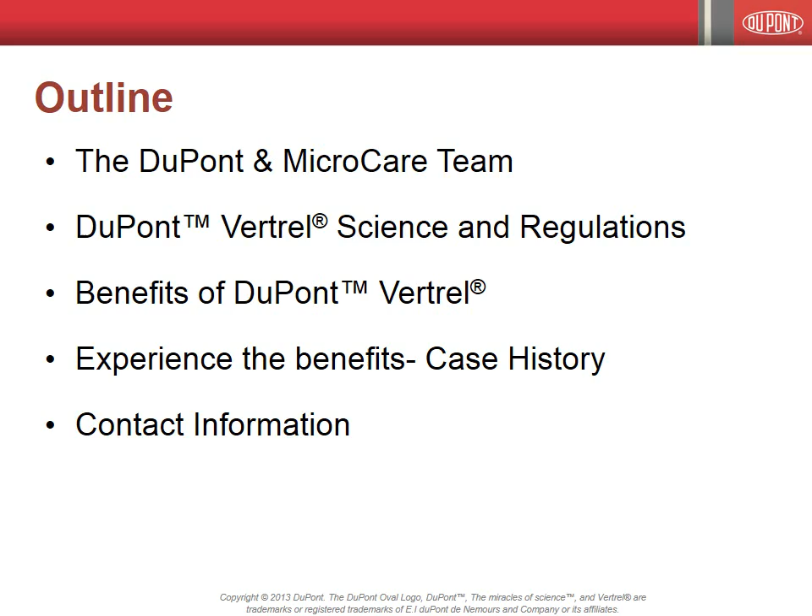Hello, I'm Tom Tattersall, Executive Vice President of the Microcare Corporation. Microcare is a leading supplier of cleaning and coating fluids to the marketplace. We are DuPont's Vertrel Cleaning Fluids premier partner for this product line.

When I am asked to describe my business at Microcare, I simply put it, I am in the business of providing clean parts for my customers. Because at the end of the day, we are judged by how the process we helped install cleans their parts. Yes, Microcare gets its revenue by selling precision cleaning fluids like DuPont Vertrel, but to meet our customers' cleaning challenges, we must view this operation as a process: equipment, labor, chemistry, operating cost, maintenance, etc. All aspects must be evaluated in order for us to provide clean parts.

In viewing a cleaning operation as a total process, we work hard to assist customers from making common mistakes. Believe it or not, people often want to piecemeal their cleaning process. In other words, force-fit pieces to make their process work, versus stepping back and viewing it as an opportunity to improve their operations. They demand to use equipment that already exists or they already own for their cleaning process without ever thinking of ramifications. Many never want any outside consulting help or assistance. And of course, we are all faced with the inertia of continuing to do what we always have done.

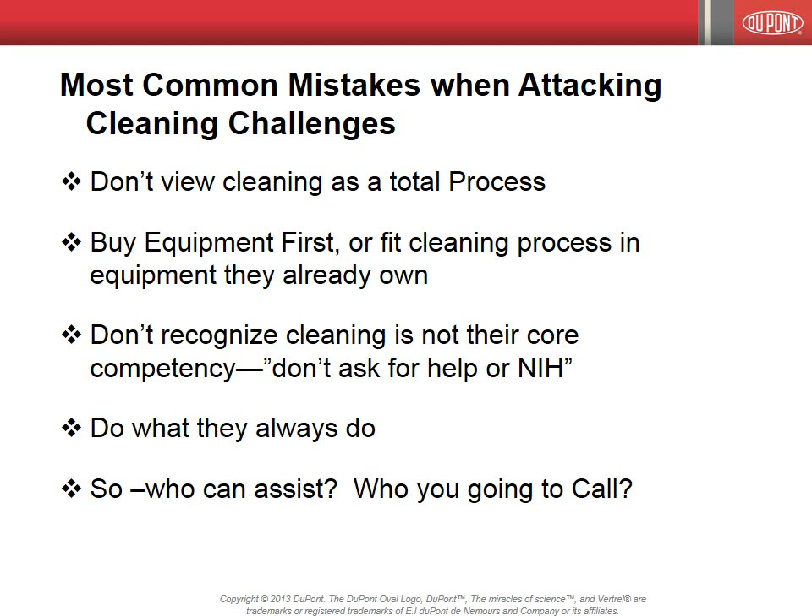Understanding that cleaning may not be your core skill, who can assist? Who are you going to call? I am here today to remind you to call us, the DuPont and Microcare team of cleaning experts. Let me share with you a few characteristics of our team, which may be new to many of you.

Part of any cleaning operation is the precision cleaning fluid, its chemistry. DuPont is synonymous with chemistry. Many different grades of cleaners have been tested and developed by DuPont to meet your cleaning challenges. At Microcare, we have nearly a dozen regional managers, all technically trained in engineering or chemistry, supporting the global regions. Both DuPont and Microcare have applications labs and high-end analytical equipment to support customers and cleaning process development.

We work hard to understand the current regulations to build you a sustainable process. All of our efforts are to design and assist you in developing a cleaning process where we strive to give you the lowest cost to operate and clean your parts. In other words, we are confident that by working with us, your cleaning costs will be the lowest dollar per part clean you could have.

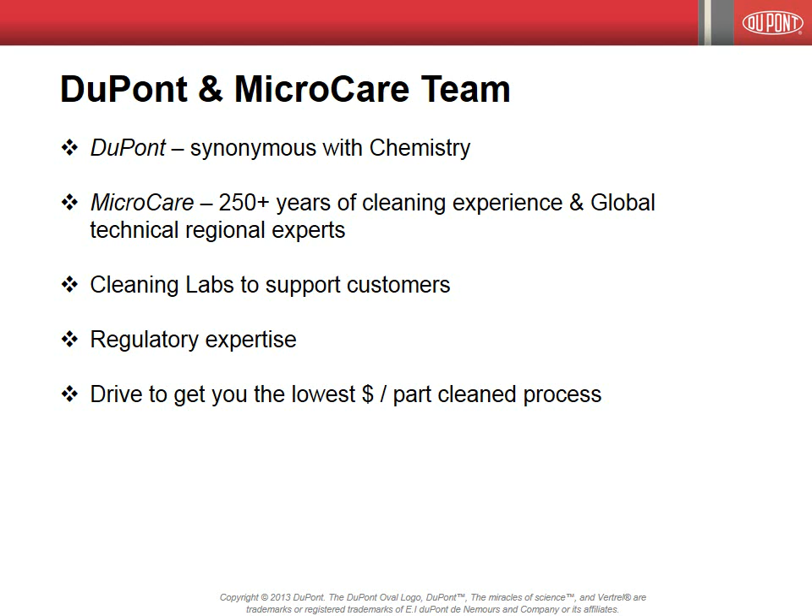It is safe to say we want to be part of your engineering team, there to assist you to meet your own unique requirements. Now, we understand some challenges are easier than others. So, what type of applications do DuPont and Microcare excel at?

I think you can look at our areas of expertise or our focus through the following outline. We work to provide clean parts where it is difficult to achieve consistent cleanliness of your parts. Examples would be parts that require the highest level of cleanliness, parts with complex geometries. They may be built with sensitive materials of construction. They may be designed with small spaces or blind holes, or nothing else seems to work. If any one of these challenges exist, we will be a big help to you.

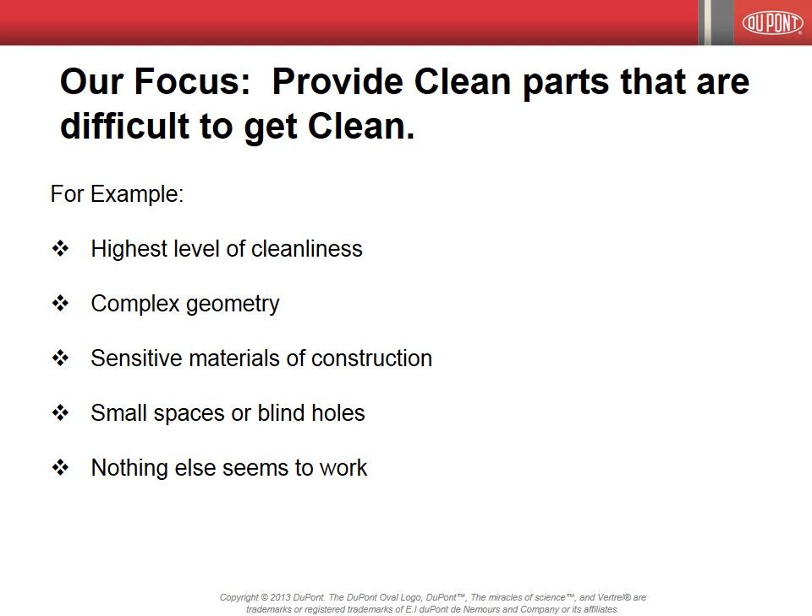We can solve the less complicated with the same thorough analysis, but the real difficult cleaning challenges are where we excel. I remain confident, as this is what we have unmatched experience with, our favorite cleaning process: modern-day vapor degreasing. Although the theory is the same from years ago, the modern-day vapor degreasing process and operation is a bit more sophisticated than before.

Many new and younger engineers are not familiar with the vapor degreasing process. The vapor degreasing process has been around at least 60 years, as it was developed to clean high-volume applications such as automobile manufacturing, appliances, airplanes, which were needed after World War II. The introduction of the circuit board introduced new cleaning requirements and high-volume requirements where vapor degreasing gained widespread acceptance as the preferred method of cleaning.

Halogenated solvents based on chlorine, bromine, and fluorine dominated the cleaning fluids of choice. In fact, all are used today. As the ozone issue of the 1990s took place, many manufacturers had little choice but to design aqueous cleaning systems for their cleaning needs. Now that many of those systems approach the end of their usable life, vapor degreasing is a worthwhile cleaning process to evaluate and choose, especially where critical parts or critical cleaning needs are in play.

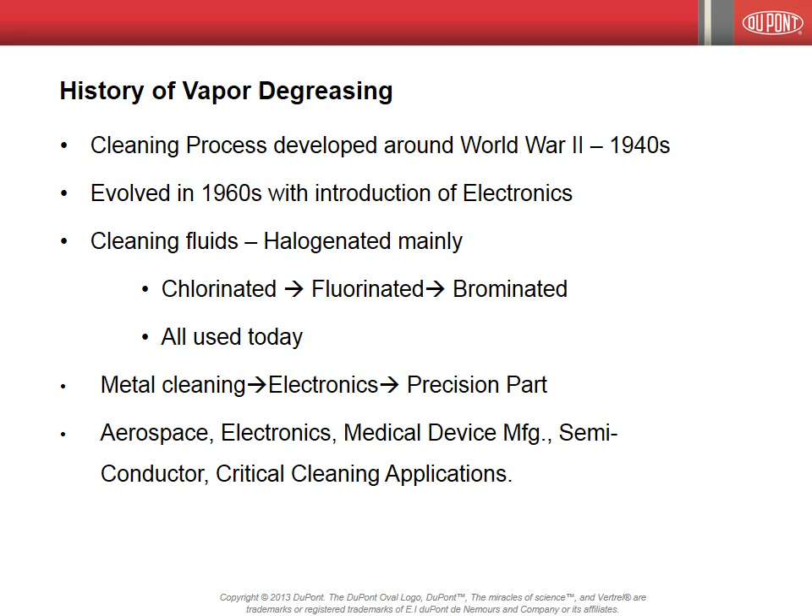There are many advantages for the customer with this process method. Why use the vapor degreasing process? Here I have listed a few of the more significant advantages.

Once the cleaning process is validated, very little monitoring is necessary to produce clean parts day after day. The manufacturing engineer and lab do not have to take daily samples to ensure the chemistry or water effluent meets their requirements. Sensitive parts and materials will not flash rust with this method. The process does not require an additional drying step.

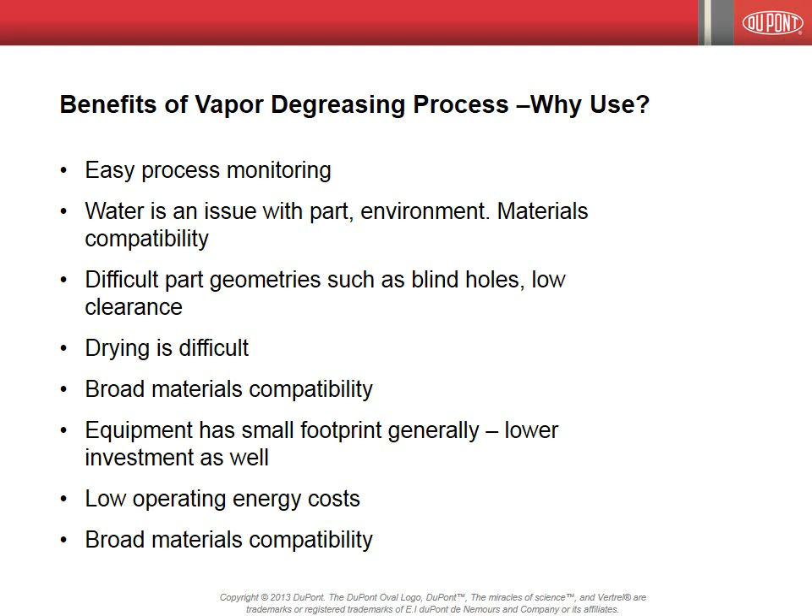Parts with extremely small openings or blind spots can be cleaned effectively, consistently. The process is highly energy efficient, leading to lower operating costs. And finally, the footprint of the vapor degreasing machine is significantly smaller than aqueous systems, and in general, less capital is required to install.

Vapor degreasers offer a very flexible process and are available in multiple sizes to handle practically anyone's cleaning and volume requirements. Here are a few design parameters which are questioned and discussed in any project. The answers help determine the size of the vapor degreaser to specify.

A key point to remember is that a solid equipment design up front assists in minimizing solvent loss during operation. This leads to lower operating costs for a customer's cleaning process. Vapor degreaser manufacturers exist worldwide, each with their own design twists for you to evaluate.

I like to consider the vapor degreaser an elegantly engineered machine. It cleans, rinses, dries, and recycles, all in one unit. Regardless of which manufacturer we are working with, they all go through these 4 process steps.

Now, before I introduce Dr. Mark Robin of DuPont, who will lead a discussion on vapor degreaser precision cleaning fluids, I'd like to review a couple key points about regulations.

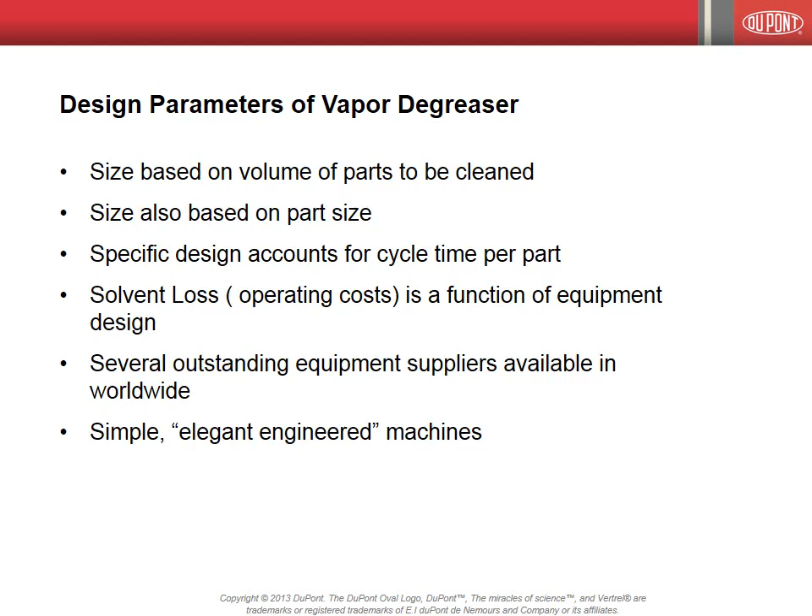The one item I want you to walk away with is that the DuPont and Microcare team can work with you to design a cleaning process that meets local, state, federal, and country-specific regulations. We understand these regulations and in turn work with our customers to meet them. The goal is a validated, sustainable cleaning process every time.

So we have chemistry and process designs that meet the following. We use USA EPA SNAP-approved chemistries. Our chemistries are REACH registered. We can meet F-gas standards. We can design a chlorine-free process as well as a VOC exempt process. Whatever your goals, we will work to meet and surpass them and provide you clean parts.

Don't believe the propaganda by other manufacturers who claim that their one solution fits all. It just isn't so. What you really need is expertise. Expertise we would like to provide as the DuPont Microcare cleaning team.

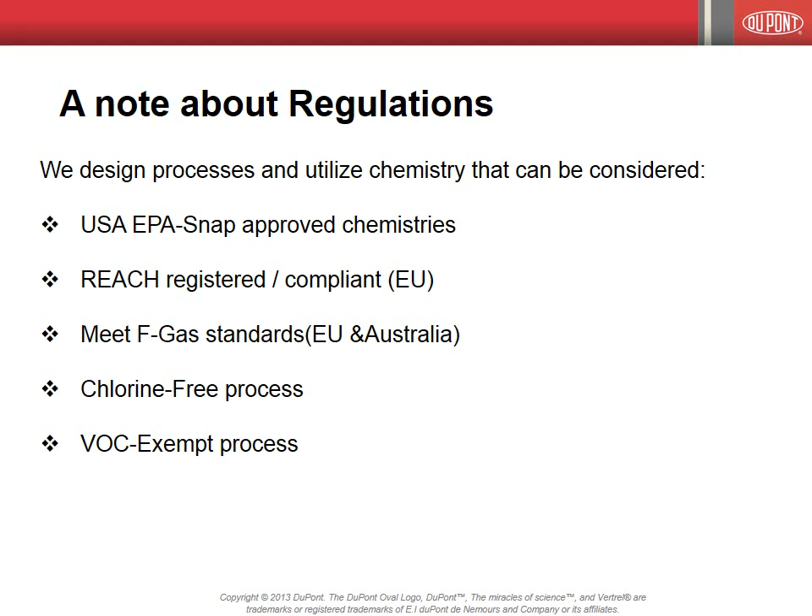Thanks, Tom. Good morning, good afternoon, or good evening, depending upon your location. I'm Mark Robin, Senior Technical Services Consultant for DuPont Chemicals and Fluoro Products. Thank you for joining our webinar, which we hope will provide you with an understanding of the unique properties of the DuPont Vertrel specialty solvents and their use as sustainable replacements for N-propyl bromide, trichloroethylene, and HCFC 225 in precision cleaning applications.

The Vertrel family of specialty fluids is based on Vertrel XF, the basic properties of which are shown here. The molecular structure of Vertrel XF imparts to it a unique combination of physical properties, which make it an ideal solvent either by itself or in combination with other solvents in a myriad of applications. Vertrel XF has a relatively low boiling point of 55 degrees C, is fast drying, non-flammable, and characterized by low toxicity.

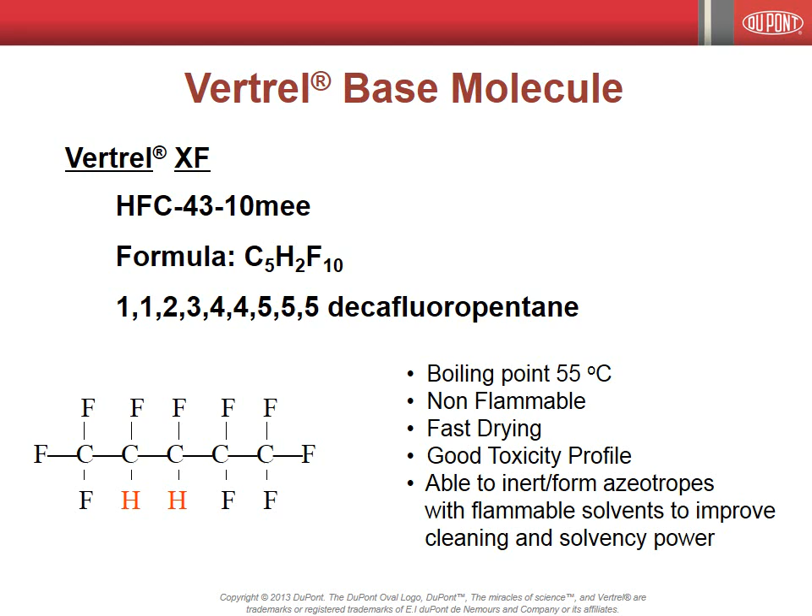The Vertrel product line is comprised of Vertrel XF used alone as a neat solvent and numerous blends of Vertrel XF with other solvents. Combining Vertrel XF with different co-solvents allows for the adjustment of the solvency power of the resulting multi-component solvent, allowing one to fit the solvency power to that required for a particular application. For example, the kb values of Vertrel products vary from 11 to over 100.

Vertrel XF can also be employed as an inerting agent, where it is mixed with a flammable solvent or solvents to provide a solvent of reduced or no flammability. The ability to mix Vertrel XF with other solvents can also be employed to improve the toxicity profile of other solvents.

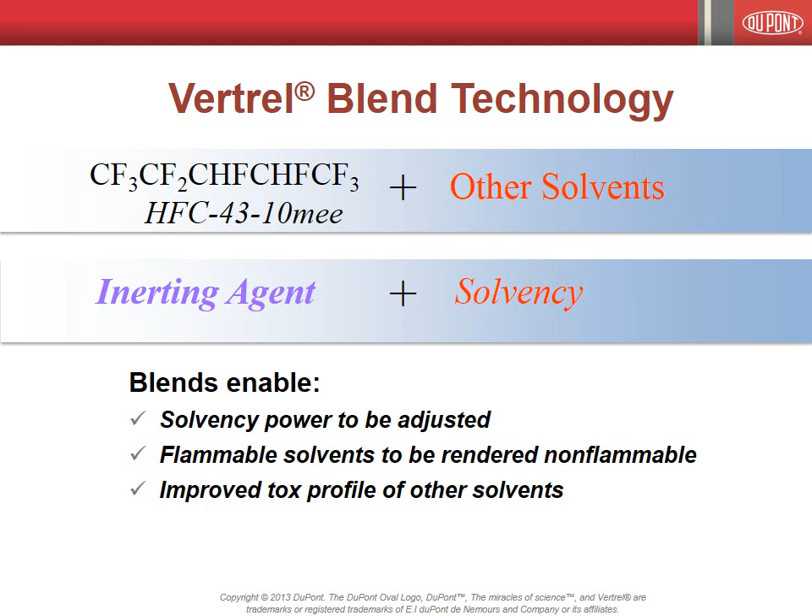This slide provides a summary of the Vertrel family of specialty fluids. As seen in the chart, Vertrel specialty fluids are suitable for a very wide variety of applications.

Vertrel XF itself finds application primarily as a carrier fluid and rinsing media, and is also suitable for some light soil cleaning and particulate removal. Vertrel XF is also suitable as an ingredient in aerosols and as a dielectric coolant.

The Vertrel XM, XE, XH, and XP products are suitable for light soil cleaning, particulate removal, and wipe cleaning. Medium and heavy soil cleaning, degreasing, defluxing, and silicone removal are readily accomplished with the Vertrel SDG, SFR, SMT, MCA, and MCA Plus Vertrel products.

Due to their high solvency power, low surface tension, and non-flammable properties, Vertrel SDG and Vertrel SFR in particular are excellent solvents for use in vapor degreasing applications.

For flux removal applications, Vertrel SFR is the solvent of choice for removal of high temperature fluxes used in lead-free and no-clean solders. For water displacement type drying applications, Vertrel XDA and XDF are suitable solvents. For absorption drying applications, in addition to silicone deposition and removal, Vertrel XP10 or XSI are suitable solvents.

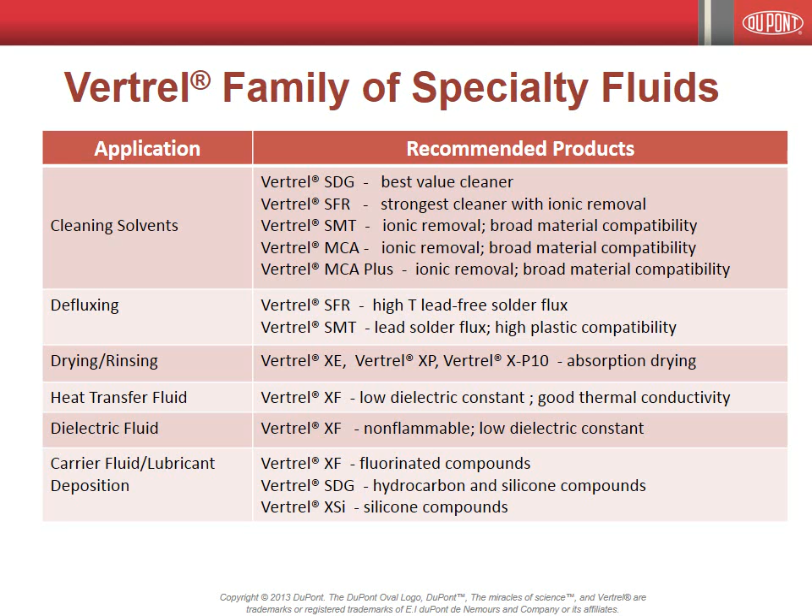High solvency power is a key criteria for solvent selection. As seen in this slide, Vertrel fluids offer a wide range of solvency powers, as measured by Kb values ranging from 11 to greater than 100.

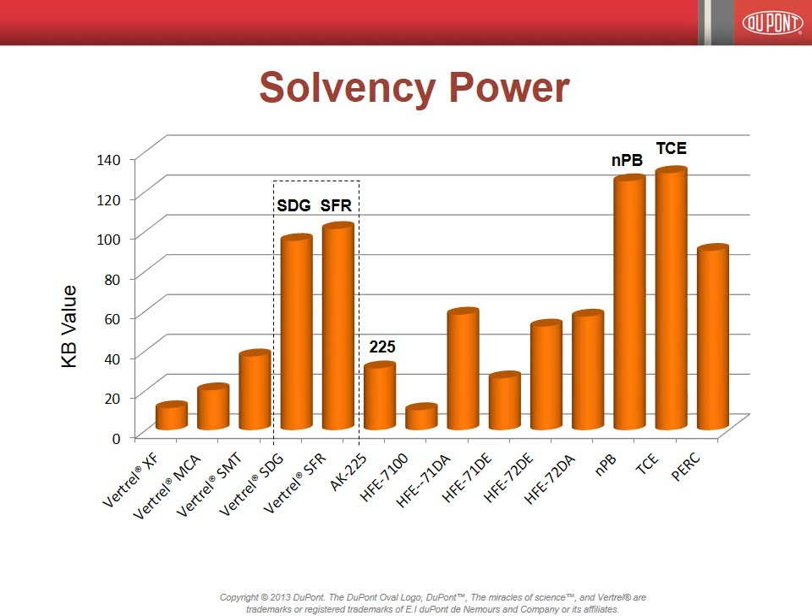For example, the solvency powers of Vertrel SFR and Vertrel SDG are close to those of NPB and TCE, and approximately 3 times that of HCFC 225, making these Vertrel solvents ideal replacements for NPB, TCE, and HCFC 225 in precision cleaning applications. Worker safety is another key consideration in solvent selection.

To ensure safety in use, the toxicity of a solvent should be as low as possible. Vertrel fluids are characterized by low inhalation toxicity and as a result pose little risk of adverse effects when airborne exposures are maintained below established limits.

As seen in the graph, Vertrel offers the lowest level of toxicity of the indicated solvents, especially in comparison to NPB and TCE. It can also be seen from the graph that the exposure limit for Vertrel is higher than that of rubbing alcohol. That is, Vertrel is less toxic than rubbing alcohol.

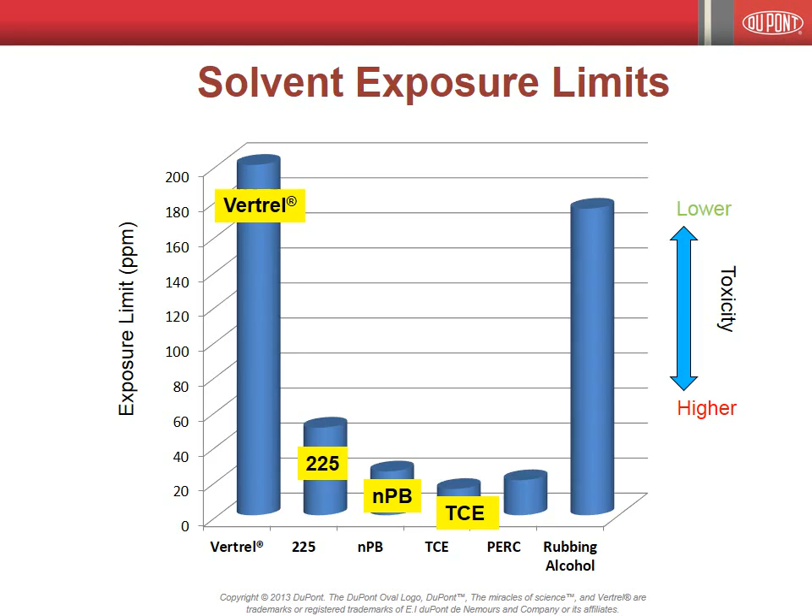In addition to their suitability in a wide range of cleaning applications, ranging from light soil removal to demanding oxygen service cleaning, the Vertrel specialty fluids, in particular Vertrel SDG and Vertrel SFR, are ideal replacements for current solvents such as NPB, HCFC 225, and TCE, all of which are faced with looming use regulations.

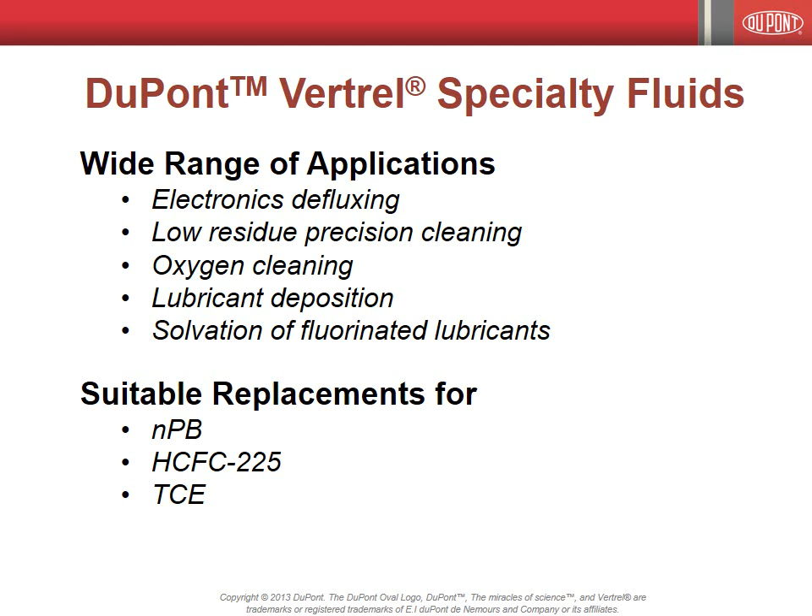Let's take a brief look now at regulatory issues related to HCFC 225, NPB, and TCE.

Due to their ozone-depleting properties, the US EPA has ruled that HCFC 225, as well as any remaining supplies of HCFC 141B, cannot be used in vapor degreasing applications after January 1, 2015. Users may continue to use solvent already in a vapor degreaser, but makeup solvent is considered a controlled substance. In addition, no stockpiling of HCFC 225 is allowed.

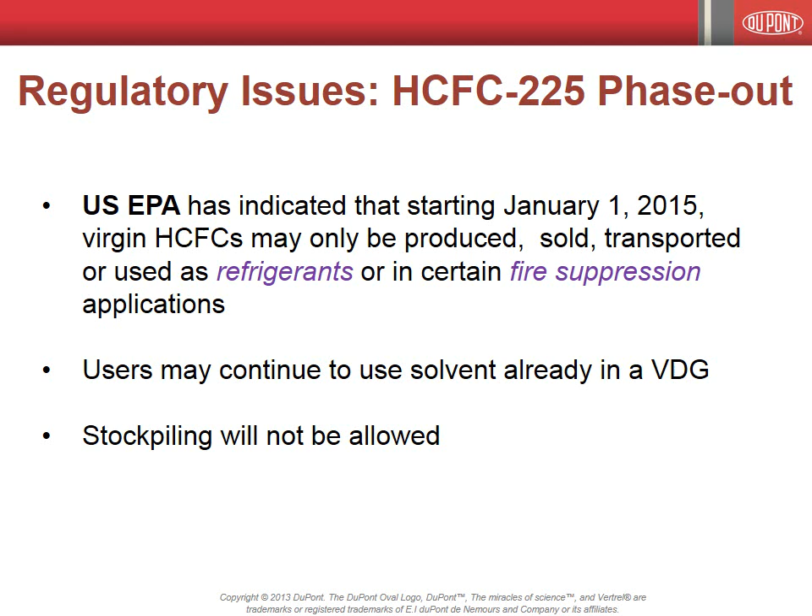NPB, or N-propyl bromide, is under scrutiny by several regulatory agencies. The US EPA is currently considering petitions to classify NPB as a hazardous air pollutant, an HAP. The National Toxicology Program of the US Department of Health and Human Services has reported that NPB is carcinogenic in rats and mice.

The American Conference of Governmental Industrial Hygienists is currently reviewing the threshold limit value, or TLV, of NPB. The US EPA recommends a value of 25 parts per million for the 8-hour weighted average TLV for NPB.

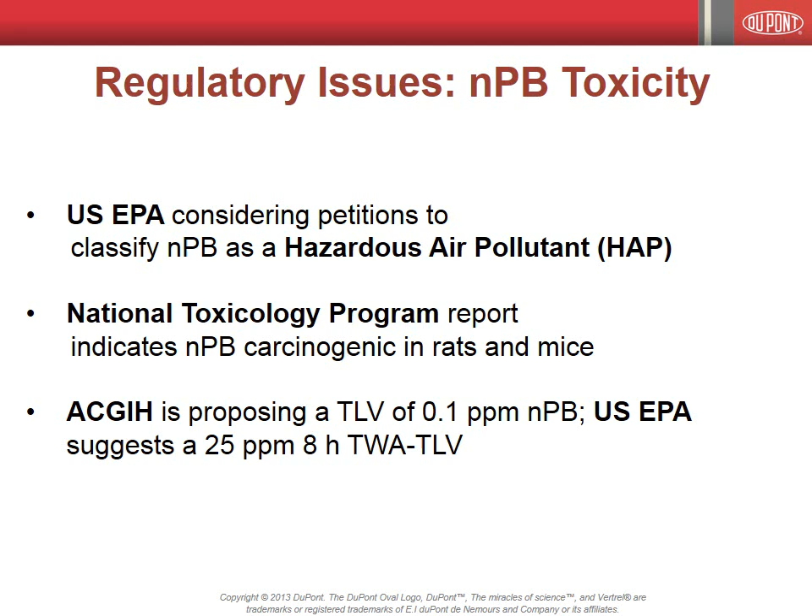In late July of this year, OSHA and NIOSH issued a hazard alert on NPB urging efforts to safeguard workers from exposure to NPB. The OSHA news release indicates that workers exposed to NPB can suffer serious health effects even long after the exposure has ended.

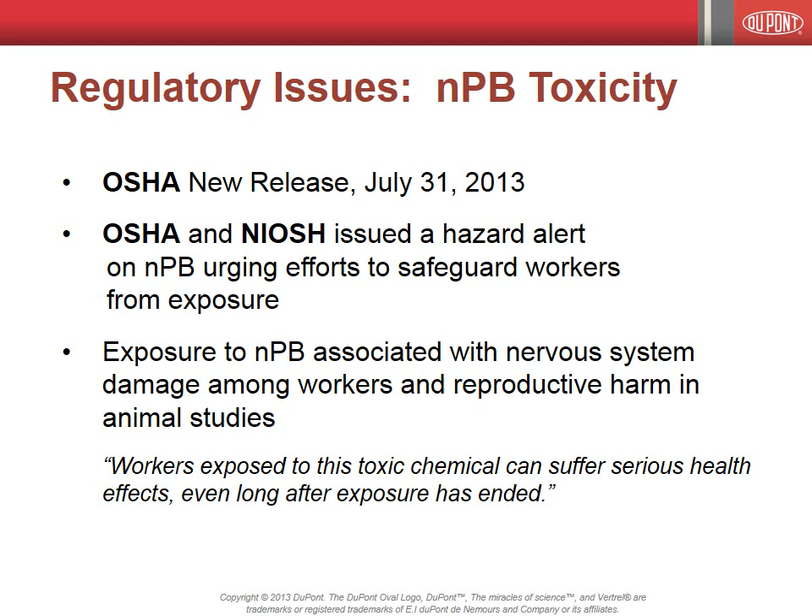TCE, or trichloroethylene, continues to face increasing regulations, both domestically and abroad, and is a potential carcinogen.

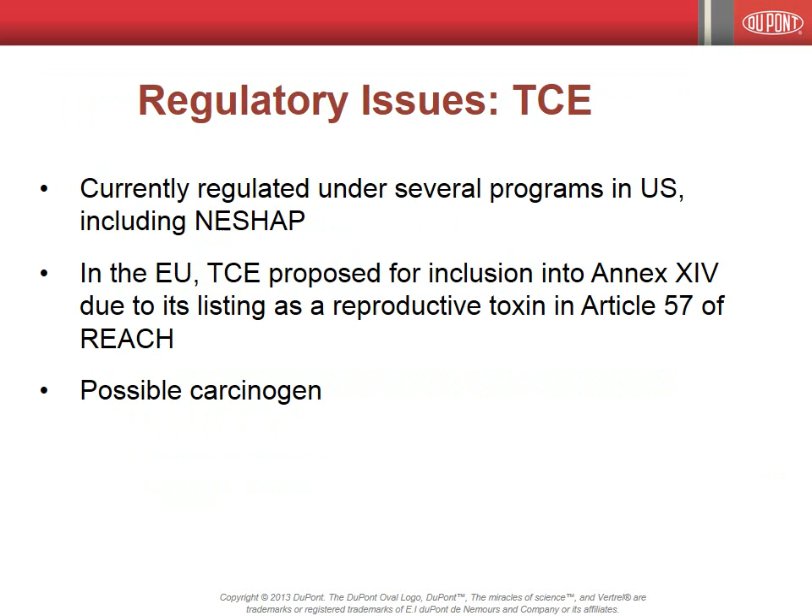Let's now take a look at 2 DuPont solvents suitable for the replacement of HCFC 225, NPB, or TCE. 2 of the most widely employed Vertrel solvents are Vertrel SDG and Vertrel SFR.

Vertrel SDG has excellent solvency power with a Kb value of 95, a low boiling point of 43 degrees C, is low in toxicity, and is non-flammable. These properties, along with its low surface tension, make Vertrel SDG an excellent ultrasonic vapor degreasing solvent.

Vertrel SDG is compatible with a wide range of metals, plastics, elastomers, and organics, and can be employed in vapor degreasing equipment with little or no changes to the equipment.

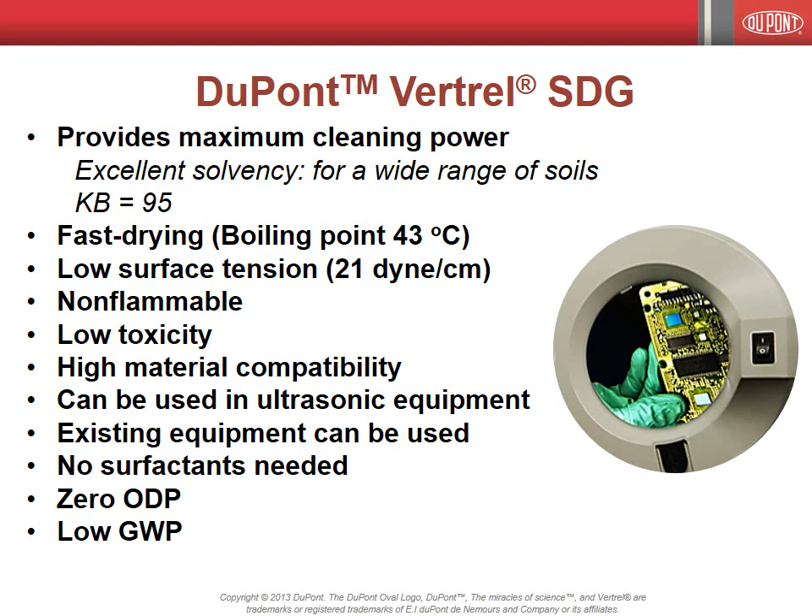Vertrel SDG is suitable for a wide variety of applications, including light, medium, and heavy soil removal, silicone deposition and tube swelling, silicone oil, grease, and wax removal, and carrier fluid applications.

Vertrel SDG is characterized by a 0 ozone depletion potential, low global warming potential, and low toxicity, rendering it an ideal replacement for environmentally unfriendly or toxic solvents such as HCFC 225, NPB, or TCE.

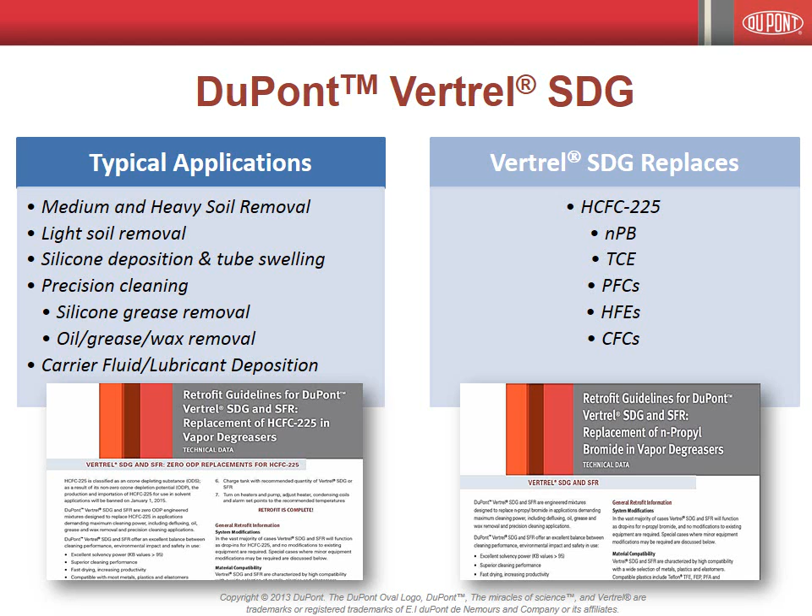Vertrel SDG was recently evaluated against other new solvents in precision cleaning applications by the U.S. Army and NASA as part of their efforts to replace N-propyl bromide, NPB. U.S. Army and NASA requirements for an NPB replacement include the following: the solvent must have a lower toxicity than NPB, and it must not be classified as a hazardous air pollutant, an HAP.

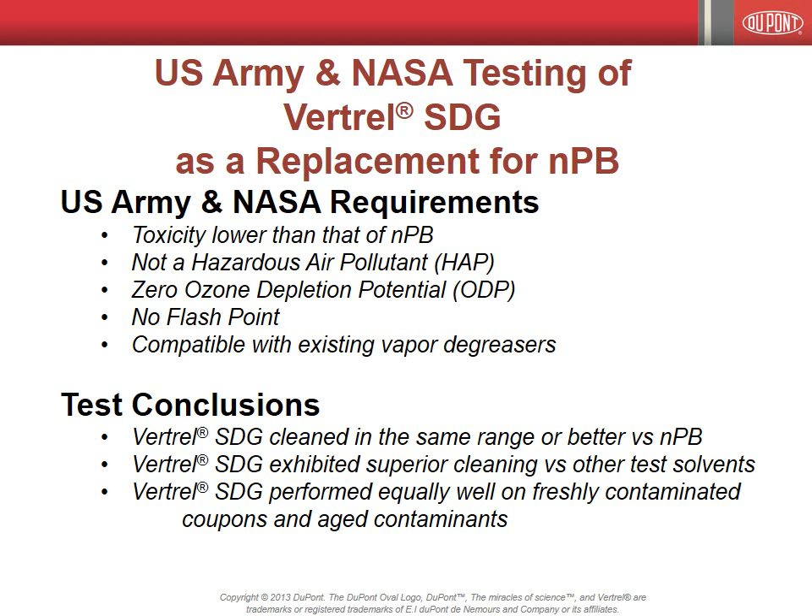The replacement solvent must have a 0 ozone depletion potential, exhibit no flash point, and must be compatible with existing vapor degreasing equipment. The U.S. Army and NASA testing found that Vertrel SDG cleaned in the same range or better than NPB, and that Vertrel SDG provided superior cleaning compared to all other test solvents. Vertrel SDG was also found to perform equally well on freshly contaminated coupons and aged contaminants. A copy of these reports can be made available upon request.

Vertrel SFR is characterized by very high solvency and is an excellent choice for ionics removal. It is compatible with a wide range of metals, plastics, elastomers, and organics, and can be employed in vapor degreasing equipment with little or no changes to the equipment. It is fast drying, has a low surface tension, and is non-flammable.

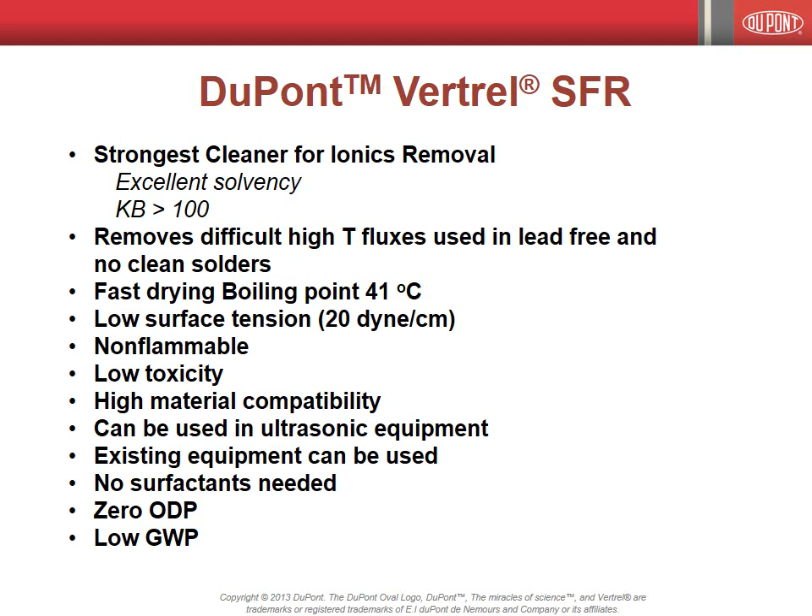Vertrel SFR is ideally suited for use in defluxing applications, for oil, grease, and wax removal, and for precision cleaning. Vertrel SFR is characterized by a 0 ODP, low GWP, and low toxicity, rendering it an ideal replacement for environmentally unfriendly or toxic solvents such as HCFC 225, NPB, or TCE.

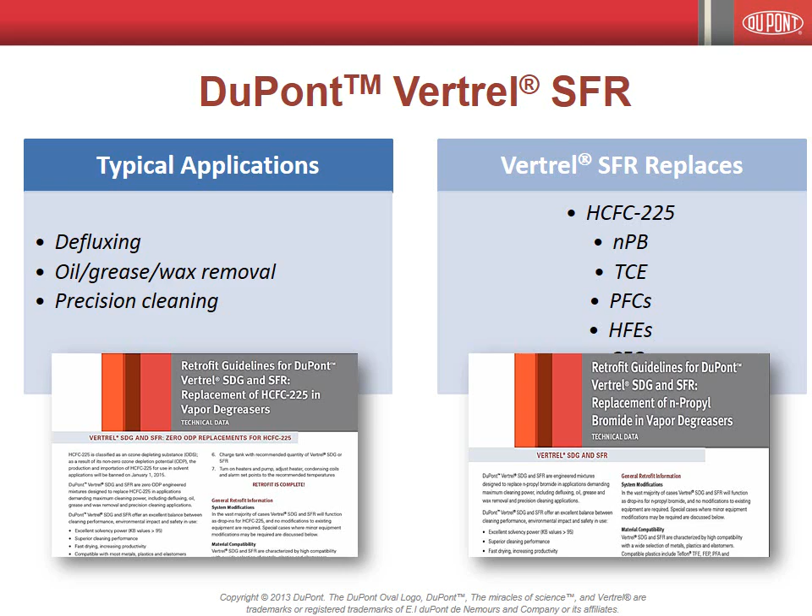In conclusion, Vertrel specialty fluids provide an excellent combination of the properties desired in a solvent. A wide range of solvency allows for a best fit of the solvent to the application, and with Kb values up to and exceeding 100, Vertrel fluids are capable of removing the toughest soils. This wide range of solvency, in combination with low toxicity, high material compatibility, low environmental impact, and economical operation, make the Vertrel fluids viable replacements for NPB, TCE, or HCFC 225 in precision cleaning applications.

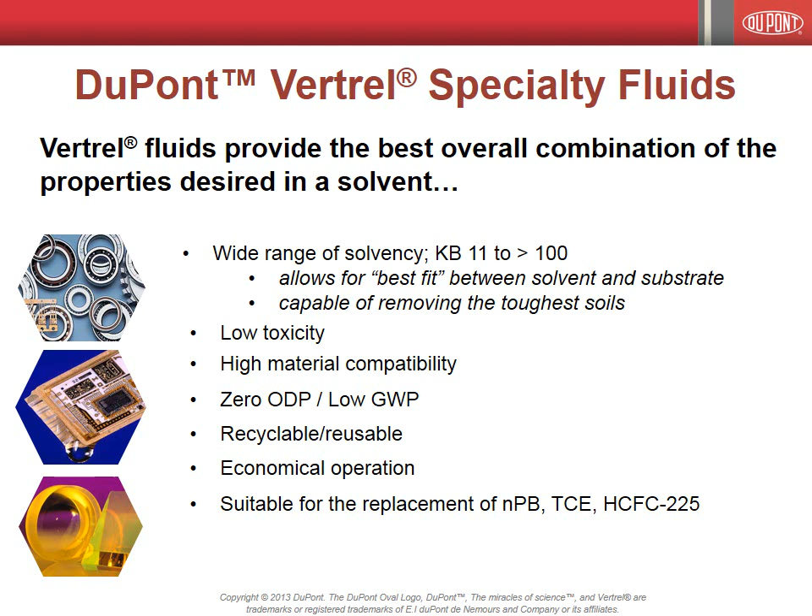At this point, I'd like to turn things back over to Tom Tattersall. In this third section of our webinar, Tom will discuss 2 recent case histories where customers put MicroCare and the Vertrel solvents to the test.

Thank you, Mark. So you can see we have a lot of options to work with in designing our customers' cleaning process. And that brings me to my charge or offer to you today on this webinar: we want to work with you. Bring us your cleaning challenges. Daily, we see potential improvements and cost reductions at potential customers. Improvements we would love to share with you.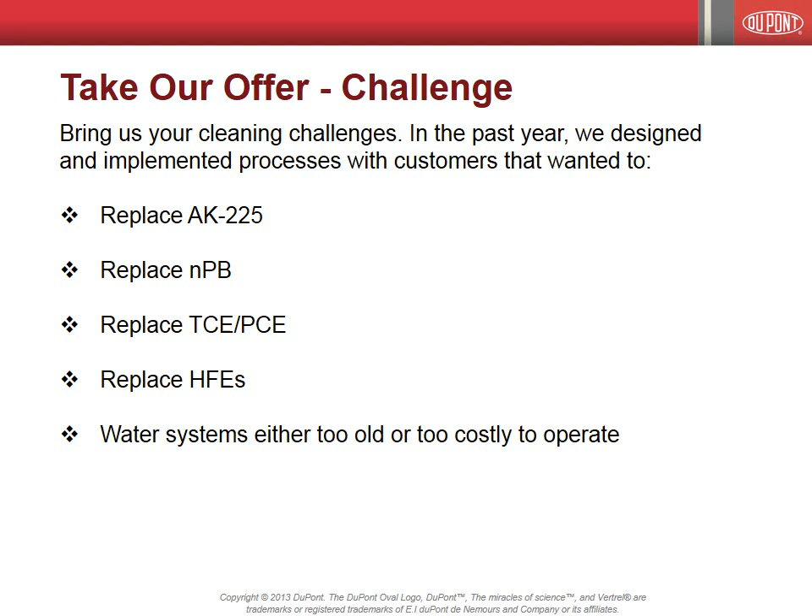Just in the past 12 months alone, we have seen an increase from customers who had the following cleaning issues: they wanted to replace AK225, they wanted to replace N-propyl bromide, they wanted to replace TCE or PCE, they wanted to replace the HFEs they were using, or they had water systems that were either too old or too costly to operate. We were able to convert all these customers to meet their new cleaning and cost goals. If any of these issues describe your operation, give us a call. Put us to the test. Here are 2 case histories where the customers did put us to the test.

This customer faced the need to increase cleaning capacity as their business grew. They had a space limitation and energy costs were high. We were able to design for them a vapor degreasing process that not only freed up factory floor space because we removed the old aqueous lines, but also increased their cleaning capacity. Furthermore, we designed a custom oil recovery system which purified the oil enough for it to be reused, saving additional dollars. We reduced their energy costs nearly 90%. Most importantly, their cost per part cleaned was reduced.

This company cleans upwards to nearly 50,000 parts per day. Let me say that again: this company cleans upwards to nearly 50,000 parts per day. Their payback or return on investment was around 15 months.

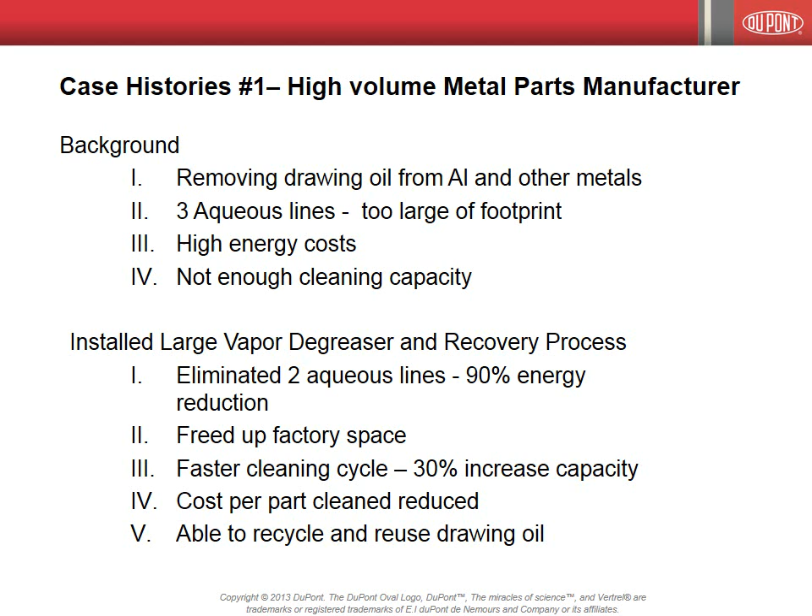My second customer case history involves a manufacturer who had a cleaning capacity increase need and also a safety concern to eliminate flammable solvents from their process. Their parts not only have a complex geometry, but in many cases exhibit some porosity. We were able to design a vapor degreasing process that met their safety goals through the use of a non-flammable solvent. Plus, we were able to increase their cleaning capacity. Once again, the cost per part cleaned was reduced. They tell us this vapor degreasing process will give them enough capacity until 2015, at which time they will install a second vapor degreaser.

These 2 examples, one replacing water and one replacing a traditional dip and dunk bath with a flammable solvent, highlight well the benefits of the vapor degreasing process, as well as the expertise of the DuPont MicroCare team. To note, both of these customers switched to a Vertrel-based cleaning fluid.